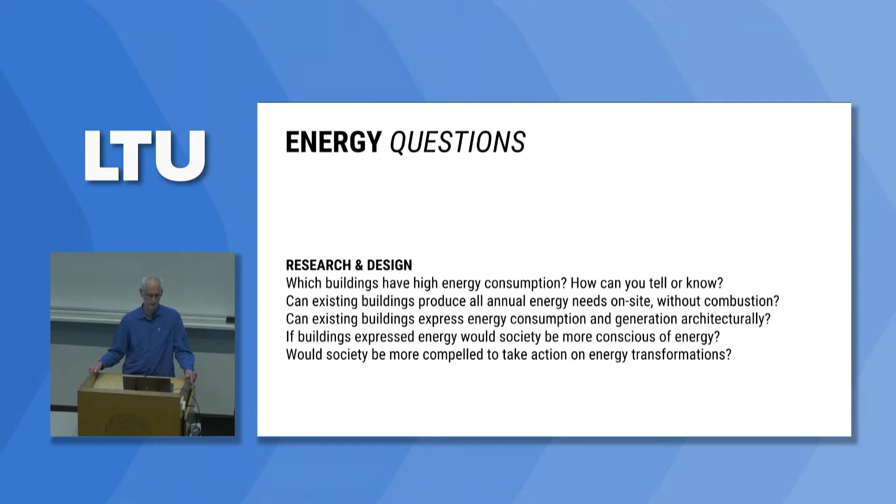I'm going to primarily talk about solar energy today, in part because it's fundamental to architecture. You know, daylight—there is no architecture without daylight as far as I'm concerned. Contemporary buildings can engage the heat of the sun for solar thermal, but I'm not going to talk about that at all. Contemporary buildings can also use photovoltaics to generate power for a building, and that's primarily what I'll focus on today.

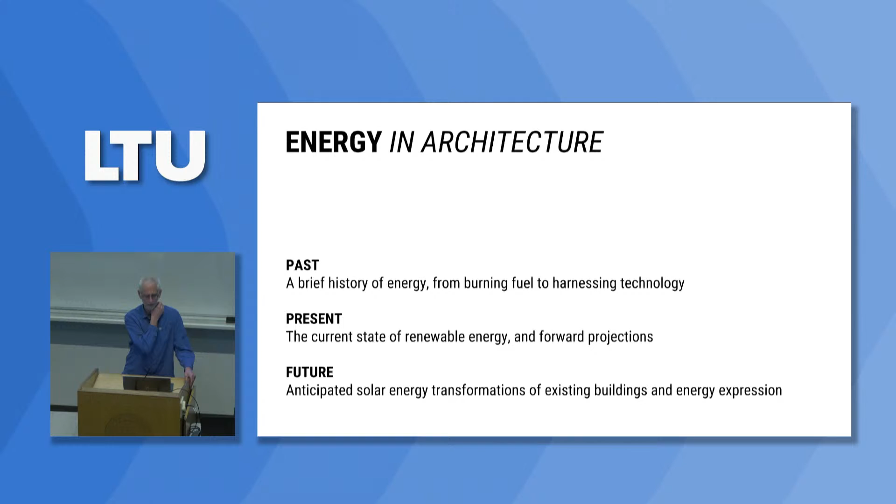The talk today is really three segments. I'll talk about the past, a little bit about the present, and then a future projection.

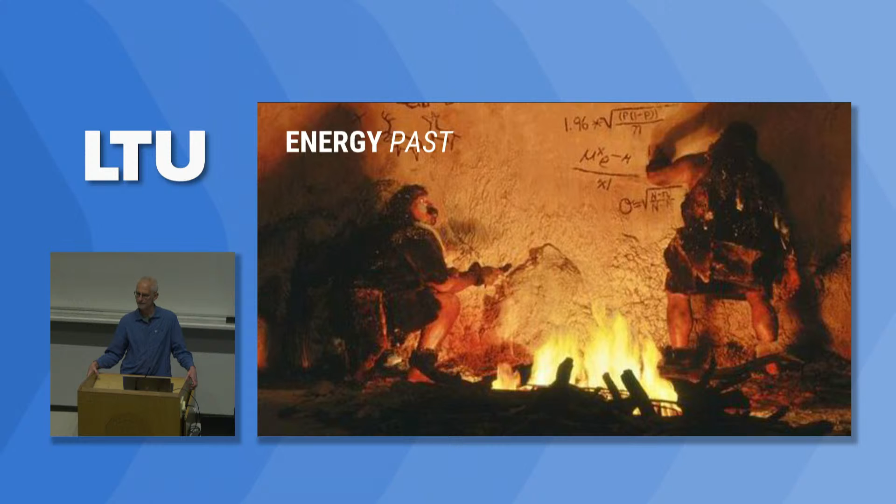So we've been burning fire for a long time for our energy needs. Fire was an amazing technological discovery, but the fact that we're still using fire for energy transformation today just seems kind of primitive.

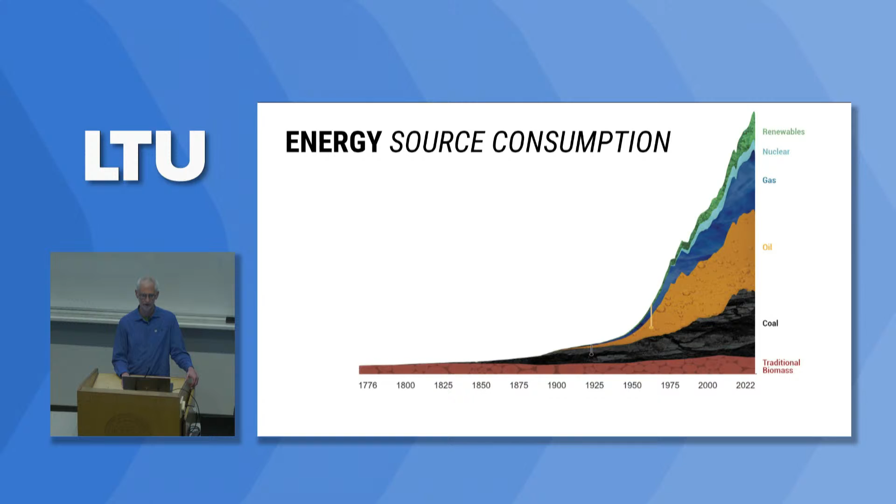Looking at the different types of energy sources, I distilled that for you all, partly to try to build a logic for how energy sources have changed pretty dramatically, pretty quickly over time. It helps us think about the future if we understand what's happened in the past.

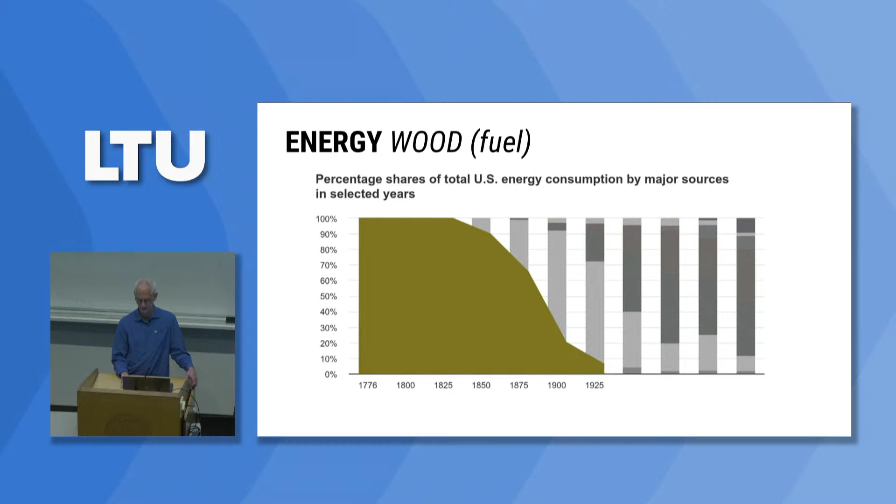So for the first 75 years of the US, basically we used wood for all our energy needs. What's interesting to me about that is it was very localized or regional. Most interestingly, every building somehow expressed energy in the architecture—it was fundamental to the character of the architecture. Not only for the buildings, but actually how spaces were defined. I think it's an amazing place.

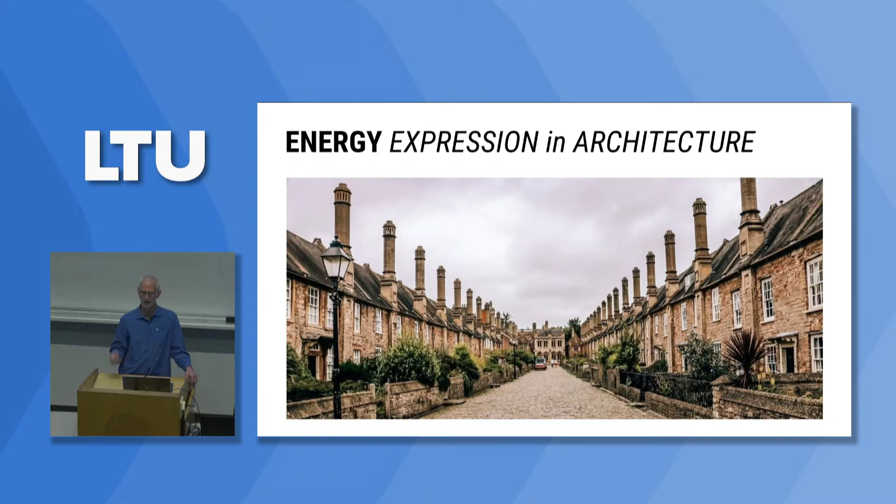I think it's amazing just because the energy expression—the expression of the chimneys—defines the street. It gives it its emotional character. But you also can breathe the energy.

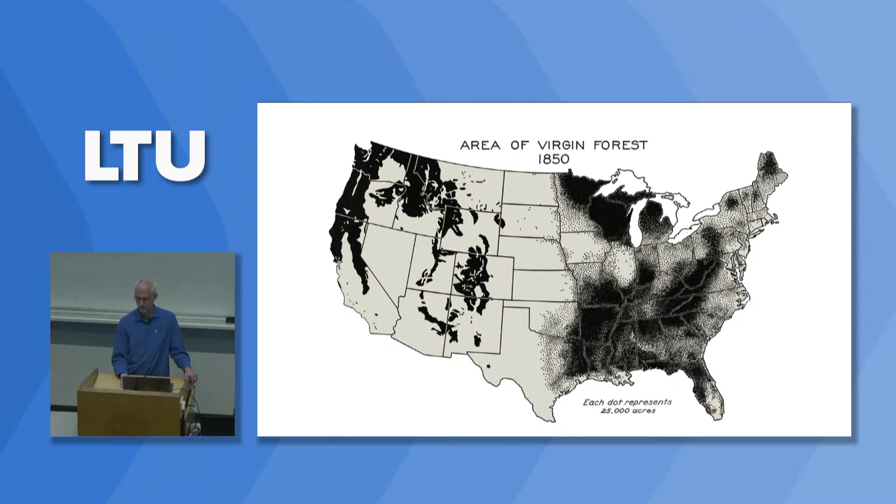Now, the downside of burning wood for fuel is you start out with a lot of trees, you start cutting them down, and pretty soon you're left with not much. So we were actually running out of fuel pretty early in US history. Another thing I think is interesting about wood for fuel is you can actually see where the source of energy comes from, see how it gets transformed, and see how much is left. And that's right in your face—it's in your environment.

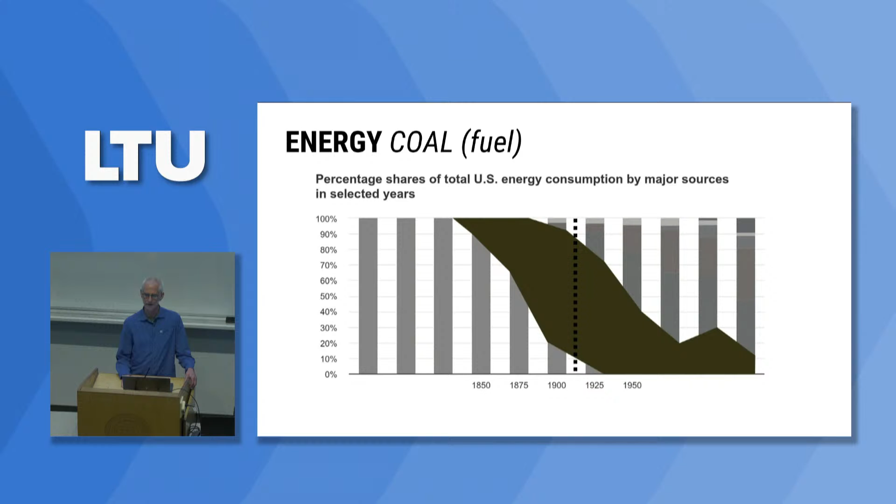So, I guess luckily or unluckily, coal quickly replaced wood as a fuel. Coal had a good run of more than 75 years, but basically by the early 1900s, we were relying on coal almost exclusively for all our energy needs.

There was some amazing architecture that emerged, kind of classic Albert Kahn building, where the energy expression, these tall chimneys, were fundamental to the character of the architecture.

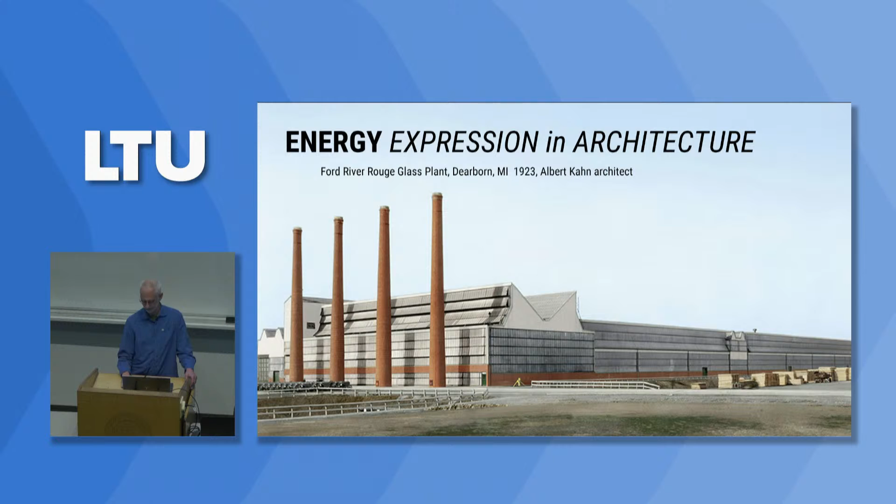But we also have long forgotten that this was what the environment was like when we burned coal. I still remember as a kid going to Pennsylvania and passing all the coal mines, getting on that hill just before you come into Pittsburgh, and right as you get to the crest of the hill, it was just black smoke and fire. The entire valley was filled with black smoke and fire. That was a reality when I was a kid. That wasn't that long ago.

I think we also are all conscious about our extraction practices and how that relates to the environment. I think a lot of people want to do something about it.

In the early 1900s, when our demand for energy started to increase, we actually were smart enough to turn to hydroelectric power. And that's still a major energy source today, but small in comparison to burning fuel. The great thing about hydroelectric is it's a technology - you're just basically using the latent energy in water as it changes level to drive turbines to generate electricity. So there's no fuel involved, it's just a harnessing of simple technology.

Our mass electrification that happened in the United States from just before 1900 until about 1950, when pretty much 100% of buildings were electrified, was in part based on leveraging hydroelectric power. The reason hydroelectric power seems kind of like a continuous band for that period is because of the rise of other things. Everyone knows the Tennessee Valley Authority - there was a whole ton of hydroelectric public works projects in the US, and most of those are still in operation today.

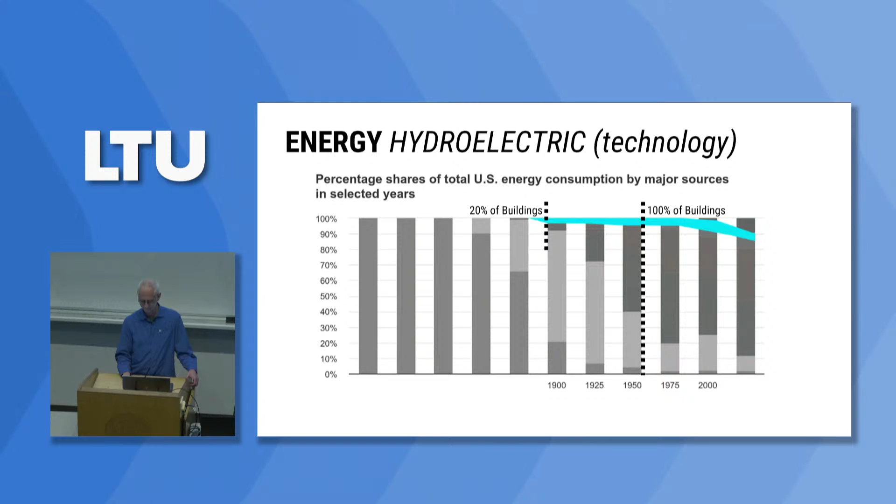So in northern Michigan, Sault Ste. Marie, in 1900 they were wise enough to build a hydroelectric plant, taking advantage of the 25-foot drop between Superior and the St. Mary's River. That's still in operation today, provides a third of the energy for the UP, and it's all done without burning fuel.

And also, this is an expression of energy in architecture. If your building is a dam and water flows through it, that's expressing the energy. Unfortunately, not every building can have a dam or have turbines in it, so it's just the source can express energy, but not the delivery or the buildings on the delivery process.

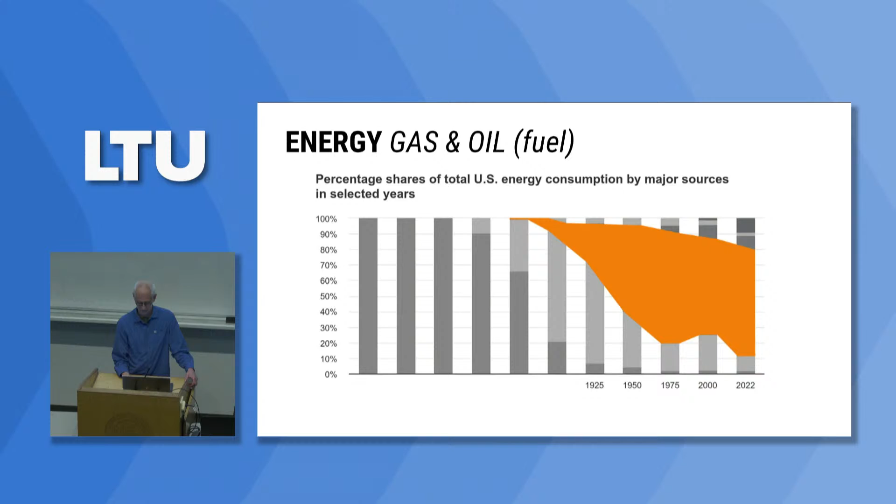So in a transition from coal, we went to gas and oil. A lot of that discovery and technological innovation happened in and around this area, Ohio especially. How is gas and oil, which is essentially the predominant energy fuel that we use for buildings today - natural gas being predominant - how does that get expressed in the architecture?

Ultimately, it's just kind of like magic. We don't really know about it. Architects have kind of relegated dealing with energy aspects to engineers, and the best we do as architects is maybe hide it on the roof or put some screens around it, or sometimes the screens are more interesting than others, but essentially we don't care.

This really made me think a lot about how we perceive energy in society. If something is not visible, you tend not to think about it. And if architecture basically hides the sources of energy, that's preventing society from actually being aware of the role energy plays in our lives. So what if it's visible to experience? What does that look like? In a way, old buildings used to do that.

Another major energy source, fuel source, is nuclear, obviously. There's some issues about why we started doing nuclear. Part of it was leveraging technology from World War II, dealing with atomic energy. Part of it was the amazing 15-year, 250% increase in electrical demand in this country - it's like the beginning of our insatiable desire for electricity.

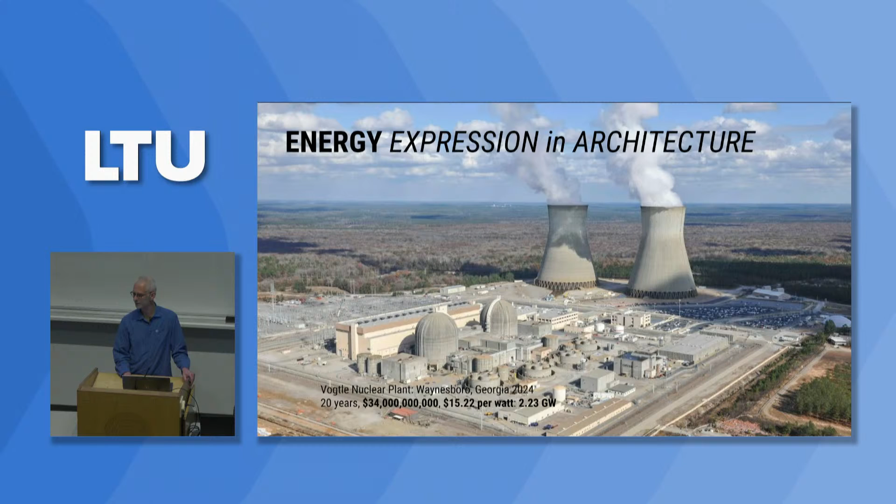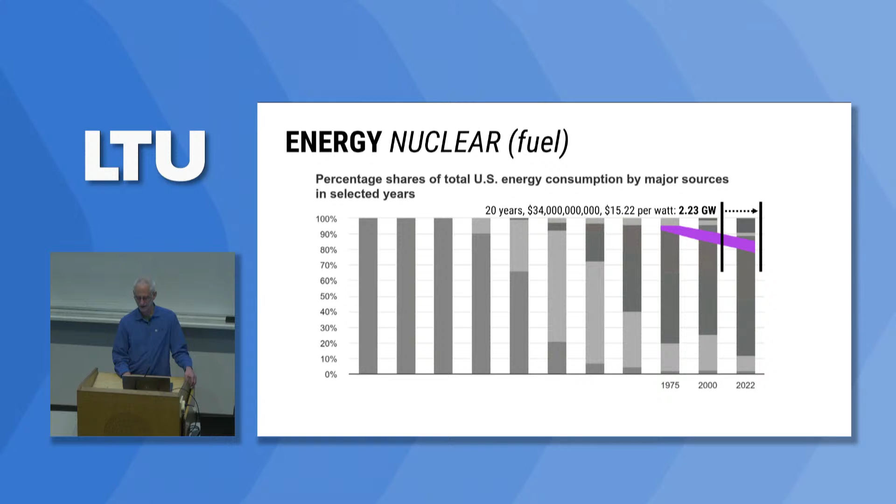If we look at how long comparatively, on this energy timeline in the US, it took for that one plant serving a small amount of people to be built, it was an extraordinarily long period of time relative to the changes that happened. So this kind of gets us to the present, where there's major energy transformations in the US.

But electricity, we all know that mass electrification is going on in society, right? And electricity is going to be our primary energy source. Electricity is great. The majority of it is produced by coal plants and natural gas.

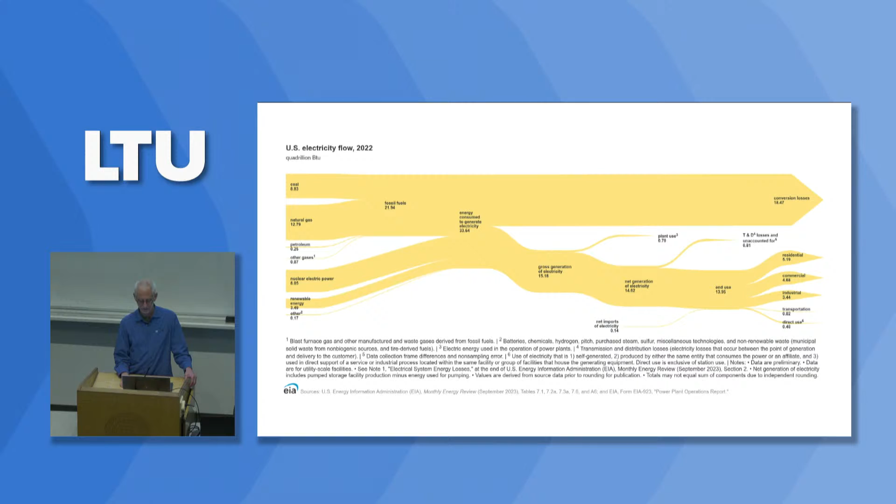The major problem with depending on fuel to burn is that 57% of the source energy is just lost in the process, through extraction, through actually heat burning, transmission loss, all of this. So really, out of all that source energy we're using, primarily for fuel, only 43% gets delivered to buildings. So again, getting back to fire being primitive, where else in society do we expect 57% loss as being acceptable? It just seems kind of bizarre to me.

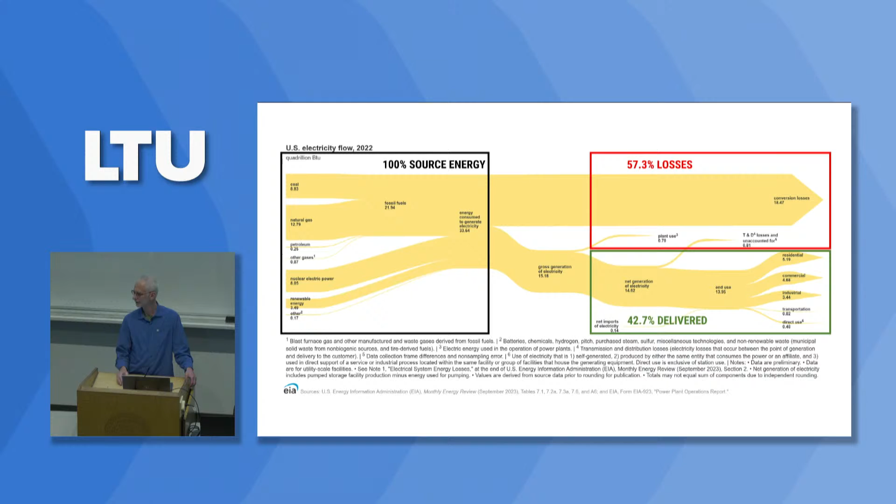So starting to look ahead, some future projections. If we want to get by 2050 up to at least 70% renewable and start to wean off of fossil fuel and primitive burning, some things have to change.

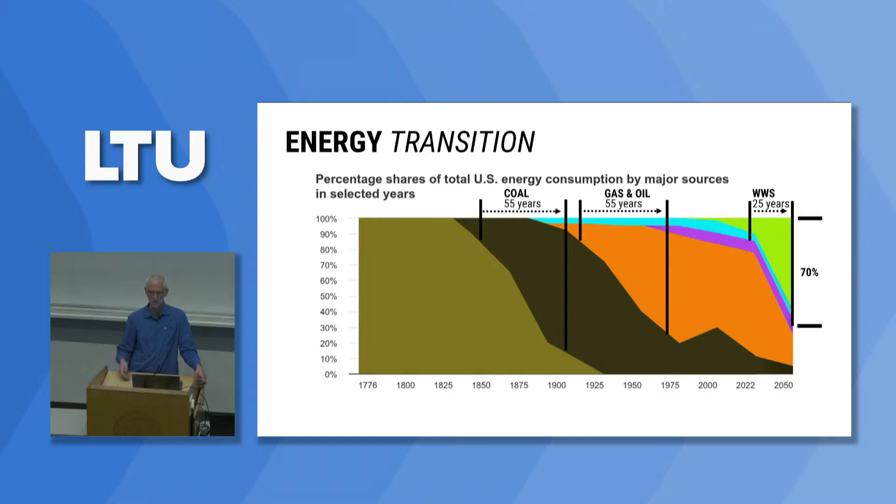How long does it take to get to 70% of a particular fuel? Coal took about 55 years, same with gas and oil, that transition. So we've got 25 years to transfer to renewables. But 25 years seems totally reasonable when looking at it in this scaled time frame. And also everything happens faster today than it used to in the 1800s and 1900s. So it seems totally reasonable to me that we could do this. This can happen.

And the sort of technologies that are emerging now, primarily wind and solar, those are also technologies that leverage existing energy sources. You don't burn fuel, you get into energy. And in 20 years, just with wind and solar, we've added 330 gigawatts. Now remember, that 20-year nuclear project was 2.2 gigawatts. So we know that in 20 years, you can have 150 times more energy potential using wind and solar.

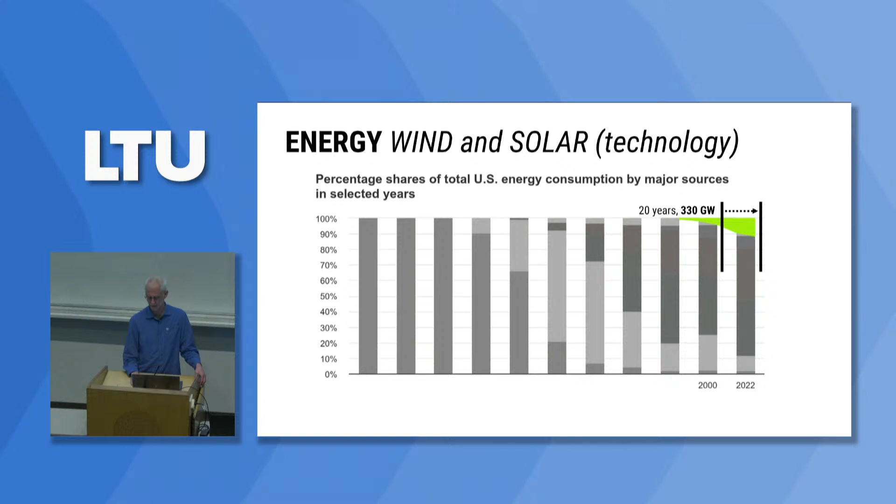So all the major US power industries are going to solar and wind as fast as possible. All of the major growth is primarily in solar because it's the easiest and least expensive. Wind is great, but you've got some limits to it, but it's $1.55 a watt currently to do wind power. That's compared to $15 a watt for that nuclear facility, right? And then sort of industrial scale PV is right now about $1.06 per watt. Of course, you need a lot of area to do that.

We were just down in Ohio on Monday to watch the eclipse, and we passed a bunch of wind farms as well as solar farms. So currently, Ohio has almost 80,000 acres of solar fields. In fact, there's one going up right at the Michigan border. This one is, I believe, in southern Ohio.

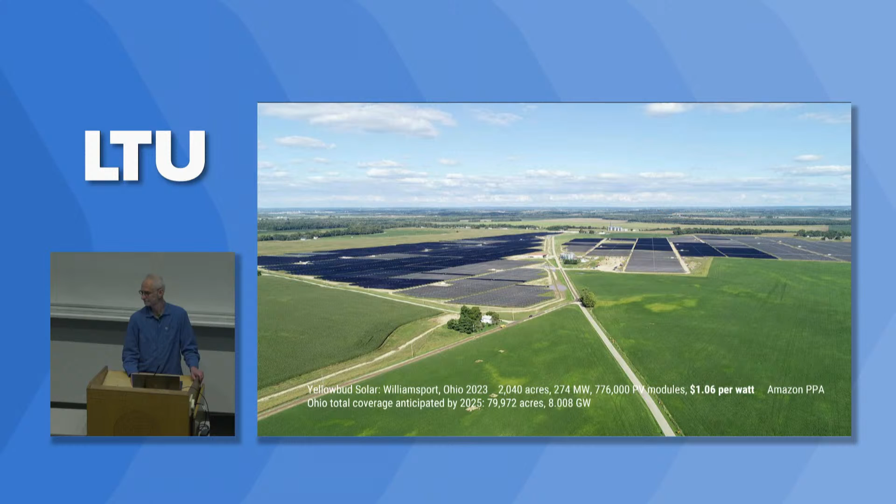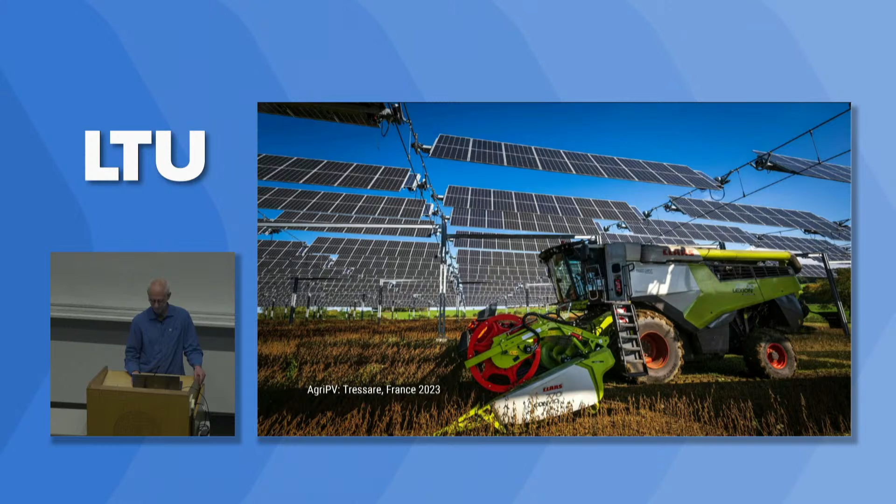It's pretty good. I wish we had in this country a policy like France has, where agriculture and PV work together, and they don't have as much land as we have in the US. Actually, it's scientifically proven that plants do better under PV because you lose less moisture from the soil. So why can't we do this in the US? We certainly can.

MSU in 2017 took another strategy. They formed a power purchase agreement to erect 45 acres of solar carports on the MSU campus. Of course, they have giant parking lots just like LTU does. But they realized early on that even though it's a purchase power agreement, they didn't pay for the carports, they didn't pay for the PV modules, they didn't really pay for anything. An outside energy company came in and said, we'll front you this, you're going to pay us a steady rate over time. And MSU decided to do it because it saves them $10 million over the life of the system.

And this is happening for more and more large institutions now because it's just way cheaper to do it. I wish LTU would cover our parking lots in this manner. The benefit of doing this is not just to save money or create clean electricity, but actually to take stupid parking lots and make them at least more interesting experientially.

And so these are now used for tailgating parties at MSU. People have some sense of experience when you arrive to campus that there's a transition from a carport to a building, and you get some protection from sun, from rain, from snow. Personally, this wasn't designed by an architect, but I think they did actually a really good job in doing this. But architects aren't really involved with this at all, as far as I'm aware.

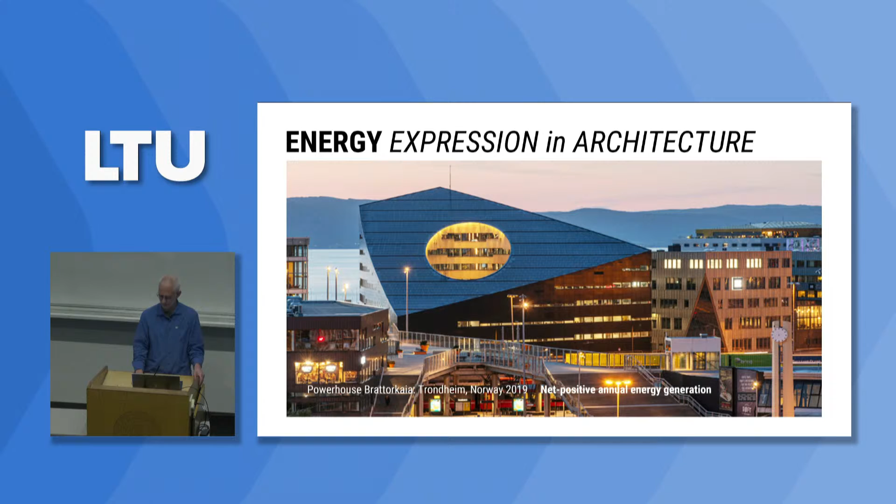So again, we have contemporary new buildings where PV integration is, I think, a no-brainer. It's relatively easy to do. Faris was telling me that architects should think about that early on so that the engineering can support it. But people commissioning buildings, there's just no reason to not budget PV because it'll pay for itself in about 5 or 6 years on any building.

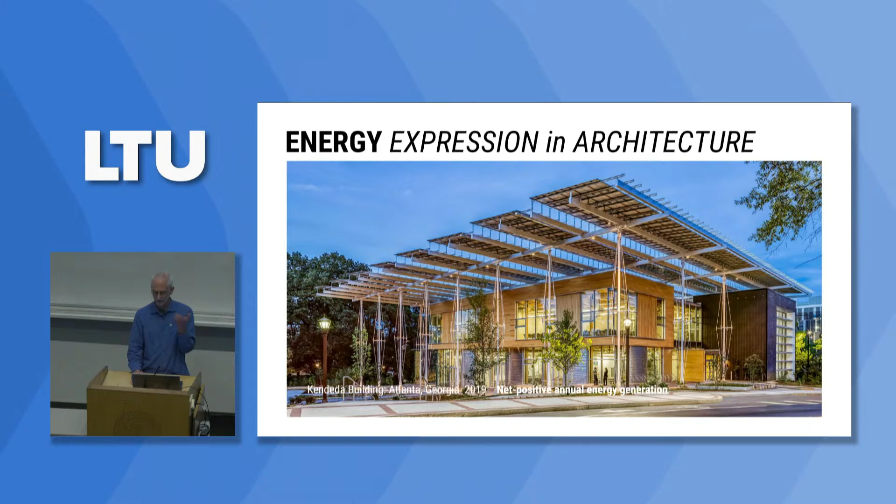Some architects with new buildings, a very, very small percentage of architects, are actually integrating large PV arrays into their new building design, and the works are notable. They're net positive in terms of energy. So I think, for me, the future generally for all of our energy needs is going to happen through technology, not burning fuel. And for architecture, I think solar technology is the most obvious. Part of that is just we've got an amazing amount of latent energy that comes to the Earth every day just from the sun.

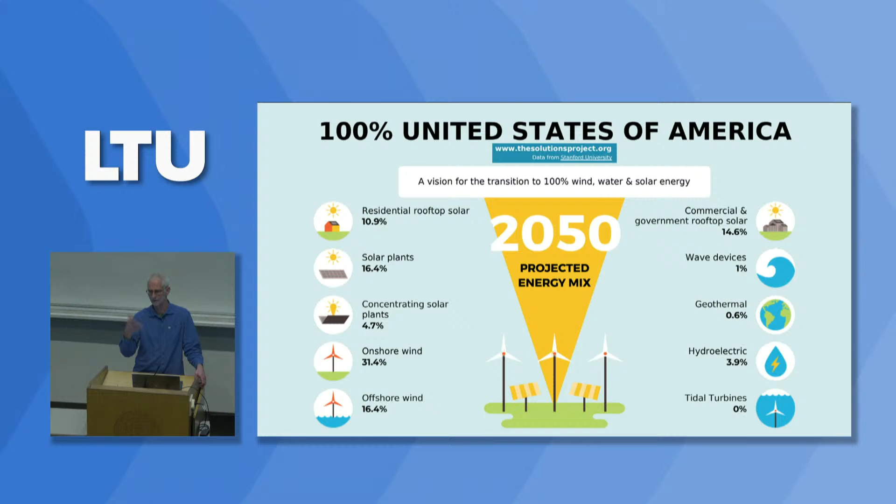So there's a very interesting website I found, an organization called the Solutions Project. Basically, they've outlined a strategy to get to 100% renewable energy by the year 2050, that's where we want to keep global warming under control. And what interested me about this is that 25% of it is going to come from integrated PV with buildings, with architecture. So that just seemed to open up a larger opportunity for architects and architecture to handle this. But also it made me think, well, what about the few 100 million existing buildings we have? How do those actually engage PV?

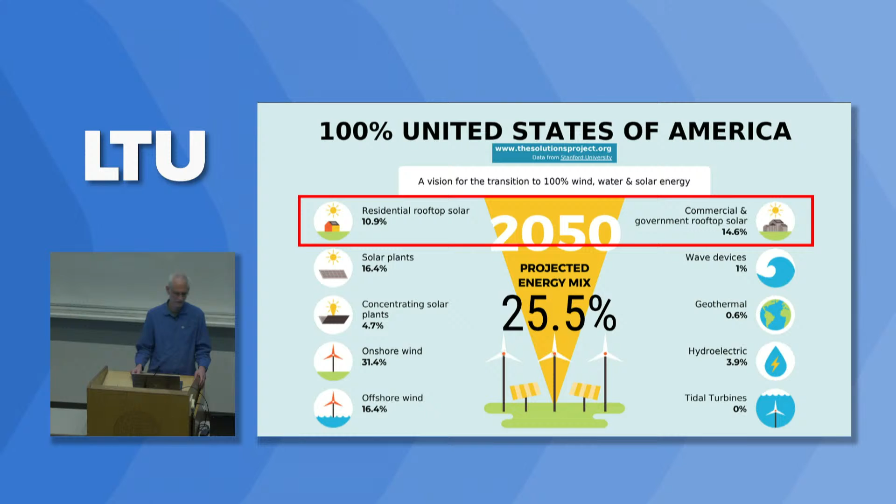So one of the things about electrification and going to renewable resources, we actually will reduce our demand by 51%, in part because we're eliminating all of those losses by burning fuel. People don't think about it, they think it's business as usual. And the amount of land that we need is less than 1% of the land and building area, so it's not out of the question.

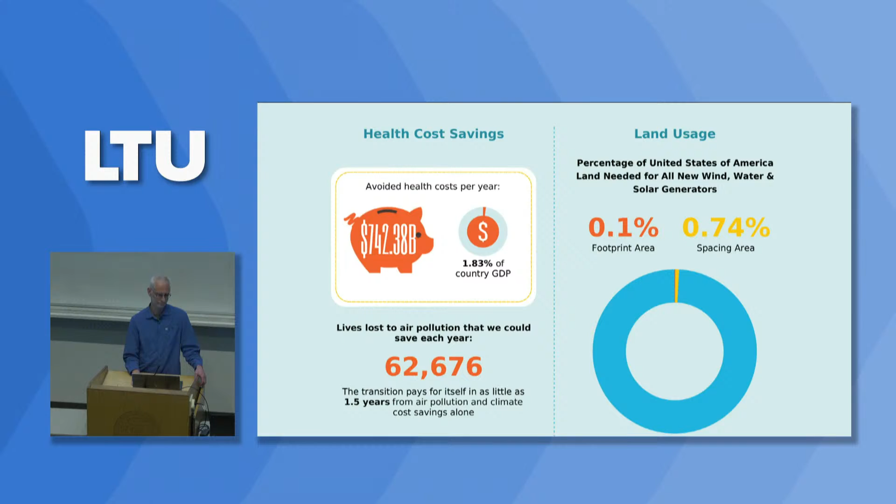And really, I think everyone is now asking the question, like, what's the future of energy? And who's going to be affected by the energy future? And of course, the simple answer is everybody, everything, everywhere going into the future. So we all have a vested interest, but it may or may not be conscious enough.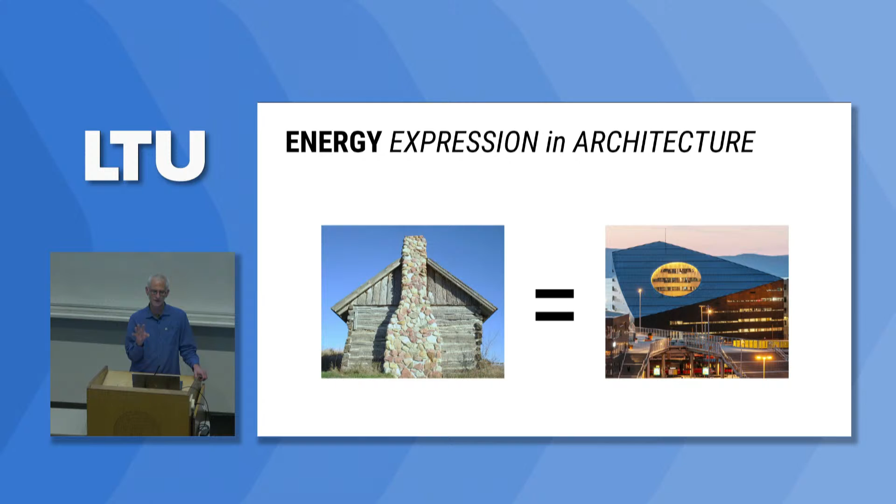So a simple diagram for what I attempted to do on the design aspect of my sabbatical was just have a desire to express energy fully in architecture, but not through new buildings, through existing buildings. So the way I framed the design aspect of the project was I selected some common buildings and common building uses that have relatively high energy consumption. I sized an on-site energy generation system, a PV array, that would be equal to the energy consumption of that building. So this equals that.

I tried to express the energy system architecturally, so it would have some redeeming experiential qualities, aesthetic qualities. And then I selected only existing buildings to test out the idea, just to see if that was a reasonable broad application.

So I think in some ways, the societal benefits and the audience for this project is really institutions, municipalities, corporations, the general public. How can we improve awareness of energy and positive perceptions of identity, mission, or brand for an institution or a municipality or a corporation? Public perception is everything.

How can we also enhance everyday functions and maybe introduce additional functions by implementing large PV arrays that are integrated with the architecture? How can we also maybe think about creating more energy independence for buildings, because we're going to have to decentralize our energy system in America?

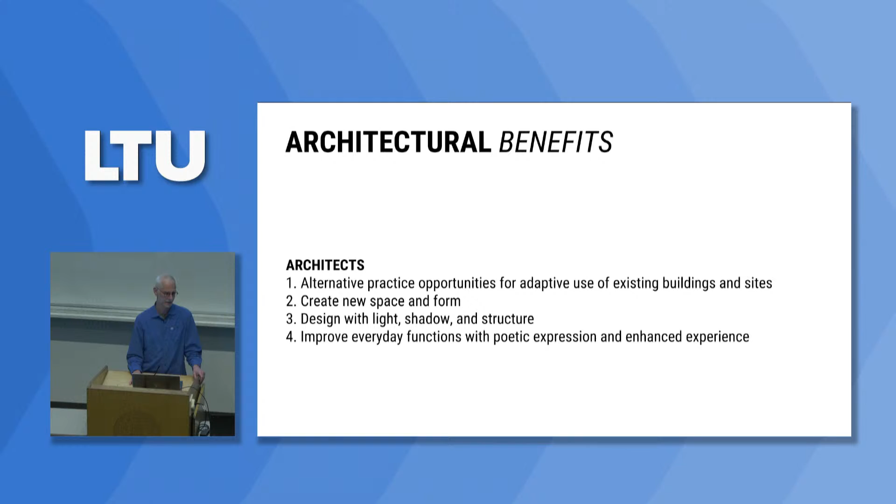They're almost out of the picture entirely right now. But architecturally, it gives you an opportunity to create new space and form. It allows you to design with light and shadow and with structure, things I love about architecture. And you can improve everyday functions with both poetic expression as well as an enhanced user experience. So those all seem like good things, good benefits.

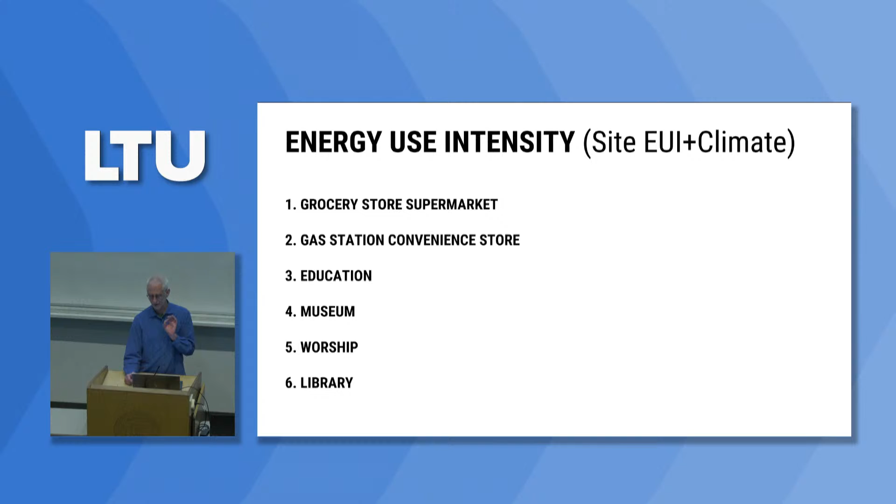So here's six building uses that I chose, in part related to their energy use intensity. So if anyone is wondering what energy use intensity is, basically it's just the amount of energy it takes to operate a building on an annual basis based on the square footage.

And there's two types. There's source energy, which is not only what the building uses, but all of the energy required just to get energy to a building. Site EUI is what I used, which is just the energy the building uses on an annual basis.

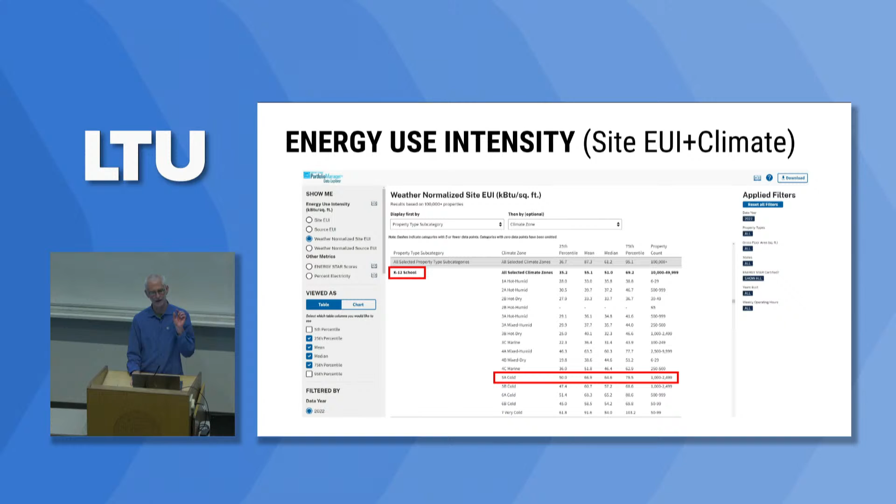Government has a fantastic website where you can actually identify site EUI for different use types that are also related directly to the specific climate you're in, because obviously buildings in different climates have different energy uses. So all of the projects here used our climate 5A, which is a cold climate, in terms of defining the energy per square foot intensity use.

In order to size PV arrays to meet that energy, once I found out the energy use of the building, I used a PVWatts calculator, which I've used a number of them. I found this one to be the most accurate in terms of validating it with real world buildings.

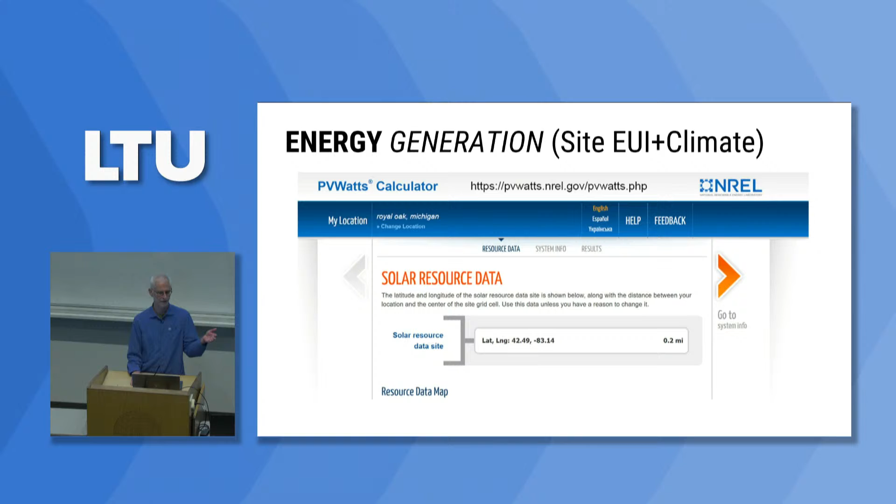And so basically, I just put in numbers, values that are related to the specific context I'm working in, and then adjust the size of the array to equal the amount of energy, annual energy produced each year that a particular building needs to have. So that tells me then, like, how many PV modules I need.

So basically the 6 sites I all chose in greater metro Detroit, and I'll take you basically on a tour of those 6 buildings. The first one was Trader Joe's.

So this is the brief version of some of the energy calculations I did. It just so happens grocery stores and supermarkets have a very high energy use, in part because of their operating hours. They also have freezers, coolers, these sorts of things.

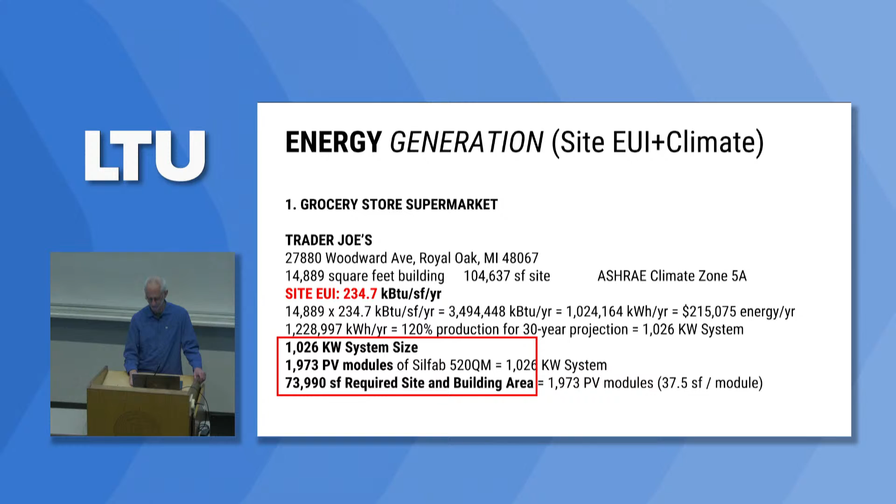Trader Joe's stores are relatively small buildings, but because of the energy intensity, they actually consume a lot of energy every year. Basically what I did in some of the calculations, I determined the building size, the size of the site, and then figured out how many PV modules I needed in order to meet the annual energy needs for each of the buildings. So that's where all these numbers come from, and this gets translated into the design.

I did also an economic run through of all six buildings. This just shows you one of them. Basically, if Trader Joe's put a large PV array in their Michigan store, their return on the investment would be a little over $9 million. So what corporation doesn't want to have a higher return on investment, right?

So this is a beautiful Trader Joe's right now. They have the dumbest buildings. They put no money into architecture. The parking lots are always crowded, and they're kind of ugly, right? So this is what it looks like now if you're coming south on Woodward. And that's if you add a canopy.

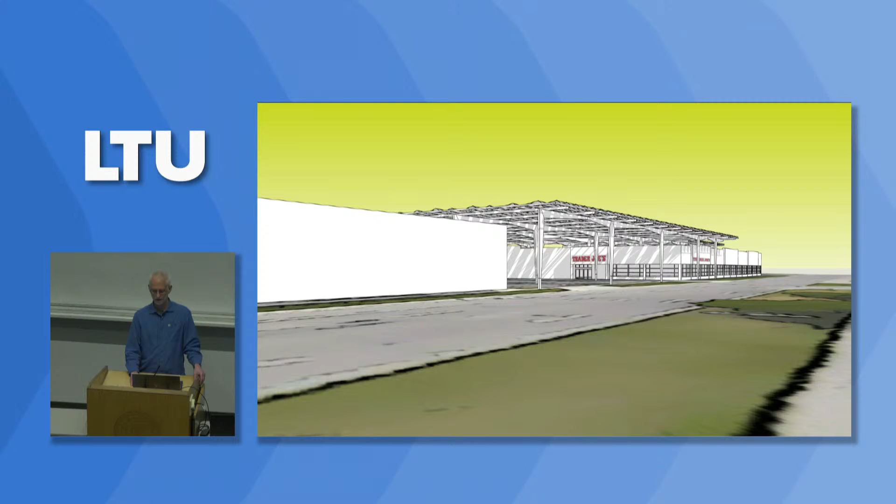First, it gives them presence on the street. Second, when you go into the canopy, there's actually a space there. It's not a nothing, still crowded as ever, but the space can be animated, modulated with light and shadow. And we can put the columns down so that cars won't run into them. Some other features, you can add a skylight system, take away the PV, so you actually have a covered entry. These are super pragmatic things, but they actually begin to enhance the everyday experience of a really stupid building and a bad parking lot.

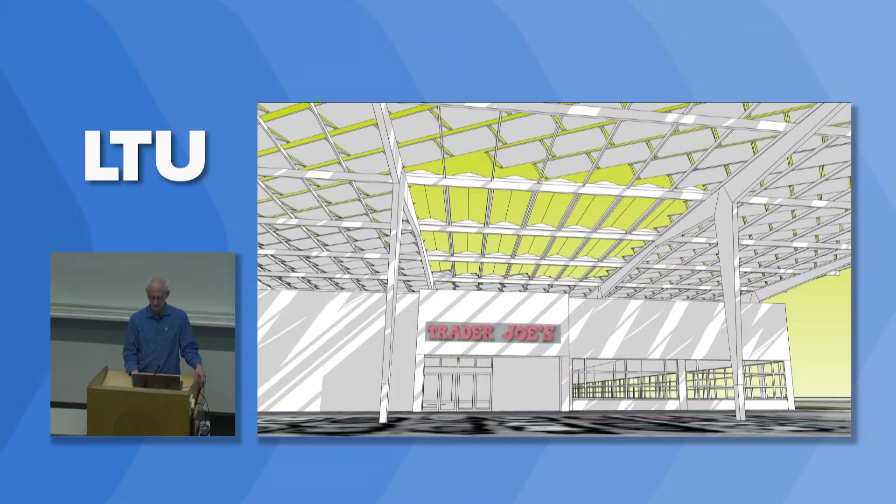Essentially, it's kind of inspired by the old Les Halles Market in Paris, this idea that cars and market and overhead canopies can all coexist and also work to improve the overall environment or architectural environment.

In terms of kind of going through how I worked through the design, I did several iterations. Solar south is up and down, heading down, and then Woodward is off to the side. Here's the large PV array that fits in. The way this would happen is basically you have to define the structure of the PV array in relation to the structure of the building. The structure in the parking lot is related to the spacing of the parking lot.

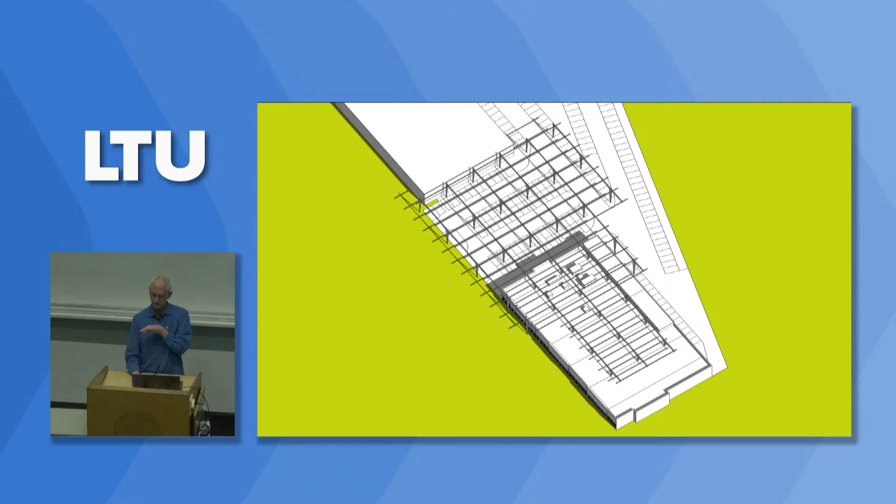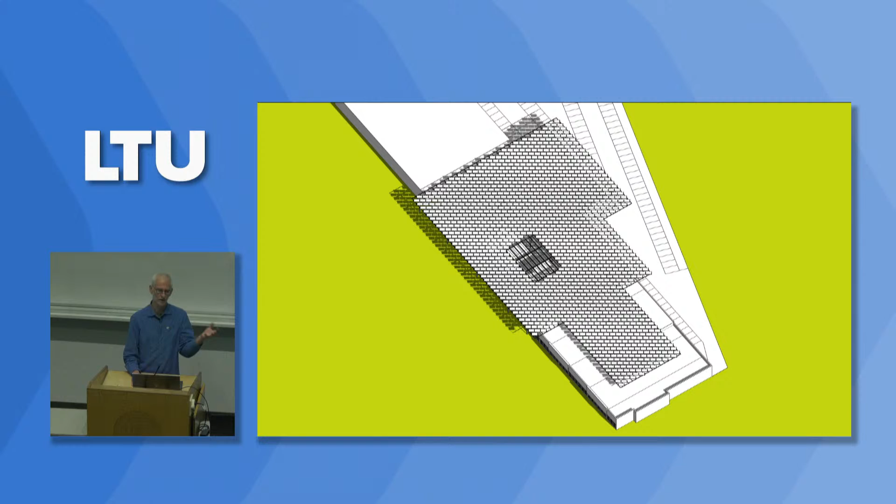You add horizontal structure to support. You'd add your skylights for the entry. You would add the rails to hold up the PV, and then the PV all goes in, biasing towards the south. I went through a number of scenarios for tilt angle, overall area, overall production. But basically, this is what it would be in context.

At a detail, basically each individual module is oriented in such a way to optimize its effect. But what's most interesting to me is to think about a PV module more like the petals of a flower or the leaves of a tree. We all find trees and flowers beautiful, and that petal quality is a certain aesthetic quality. If we thought about PV modules not as just dumb things for an engineer, or practical things, but how can we express them architecturally, I think it'd be more interesting.

The second project is a BP station. This is basically at Woodward and 94. Beautiful building. I don't know why they have such ugly buildings for a major oil corporation. You'd think public perception would be important for them.

Their annual profits of $13.8 billion in 2023 suggest that they have some money to spare. They spend about $200 million a year on advertising. You'd think, well, isn't public perception really important for energy companies? And what can they do to actually increase general public support for their endeavors?

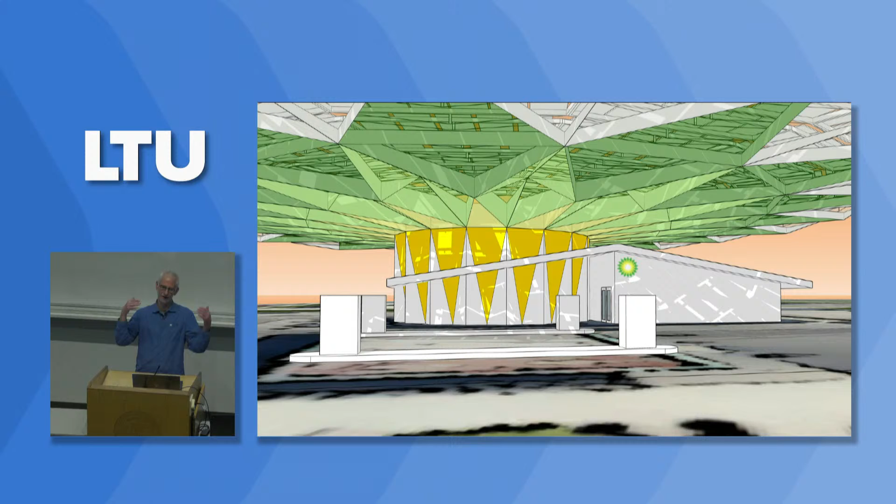It was important for Mobil to change its image. I think it should be important for BP to change its image as well. Part of what I like about this is that most of the energy used is just for pumps and then refrigerators and coolers for the convenience store part. The idea is that you literally see the energy of the PV transforming down into areas where you have the coolers on the inside, and when you look up, you can actually see that architectural effect.

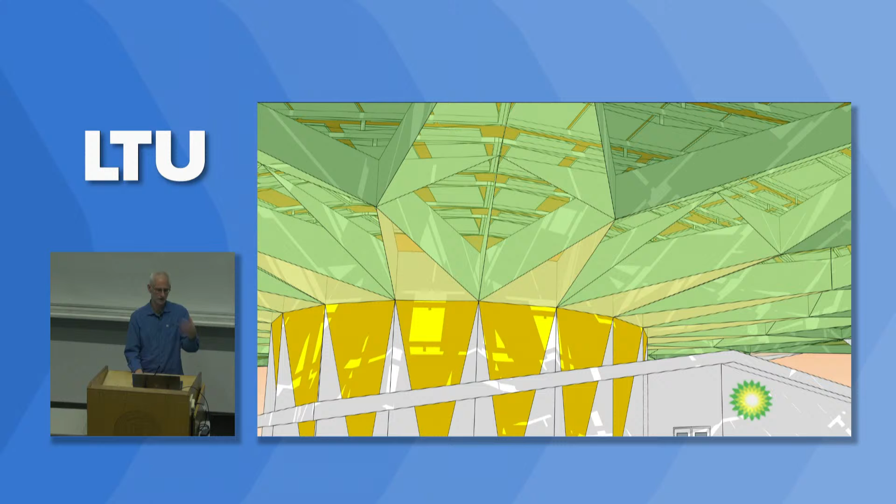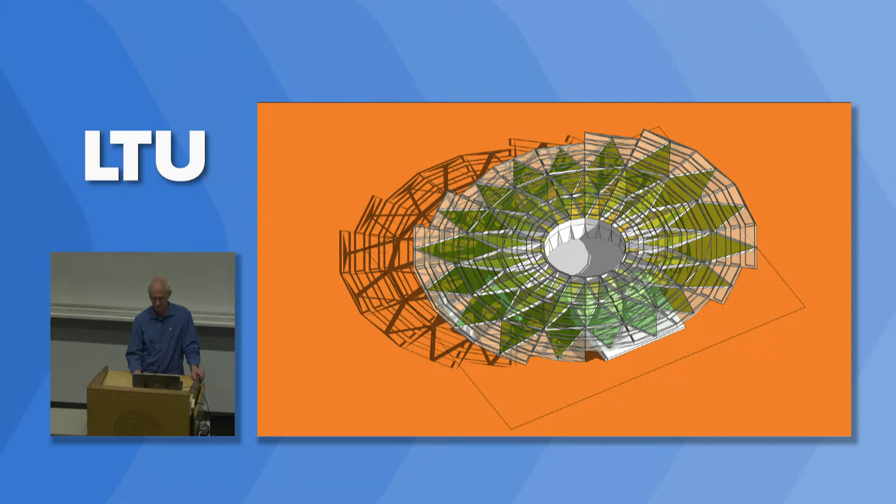In terms of how this works, there's a particular orientation on the site. First, get rid of the old canopy, add new support within the building. The structure for the new canopy could be some sort of carbon fiber or a mix of ETFE and carbon fiber. Rails for the PV, and then finally the petals.

So its presence on the site, or the Google Earth view, also has something to do with projecting what BP is about.

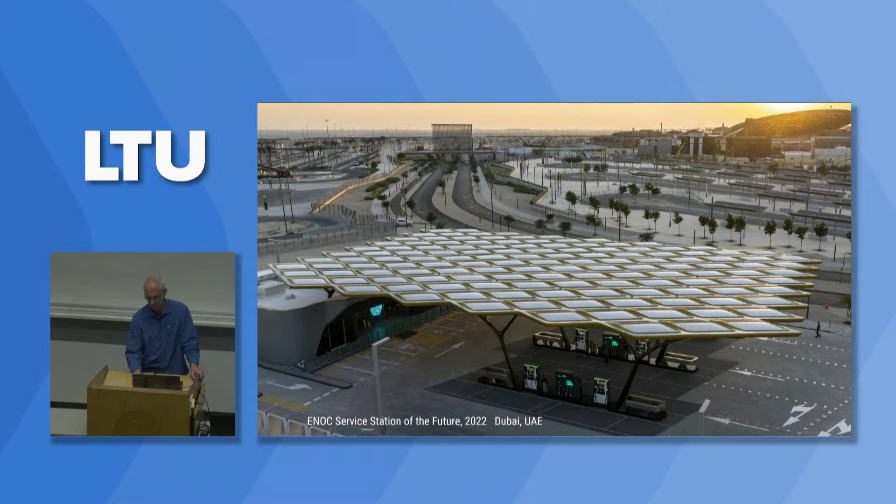This is a service station built in Dubai for a major exposition. It could have had PV, but they actually have an off-site PV that powers this building. These are basically just skylights over the canopies. It does have a carbon fiber structure, with a light and magic show underneath. So interesting, but it doesn't really address energy. It does address architecture—I think it's pretty awesome, but I wish it actually addressed energy.

Next project was Cass Tech High School near downtown. Some of you may know it. This is what the building looks like now. It was actually a brand new building in 2005, costing $127 million at the time.

They didn't budget anything in for a PV array, although at the time that would have been the perfect time to do it because it would have paid them back tenfold by 2024. They have major energy expenses, a giant building, 240,000 square feet. I don't know how many square feet we have on the LTU campus, but they have 2,400 students, 140-some staff—it's like a little village, a huge complex. The architecture has sort of a tech quality to it.

Surprisingly, schools, universities even more than high schools, are pretty intensive energy users. In order to have a PV array that equals the amount of energy used annually for this high school, you need 7,667 modules—a really big system, almost 4 megawatts. And you need about 360,000 square feet of space to support that.

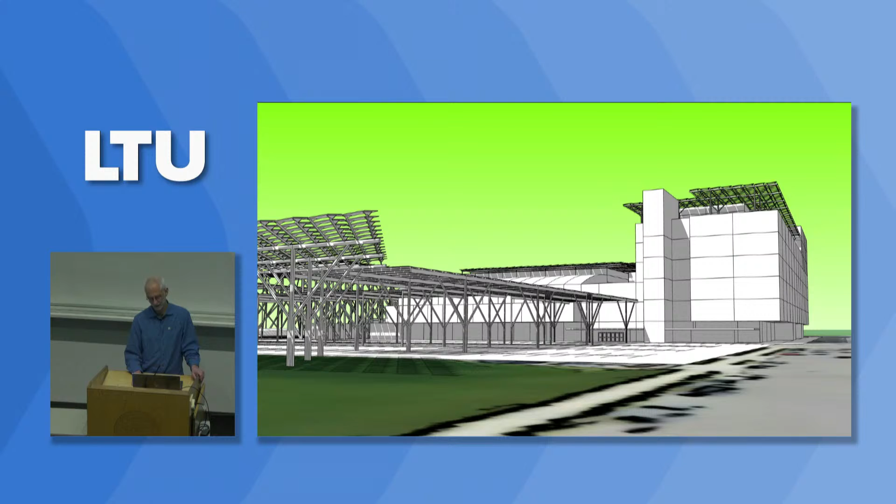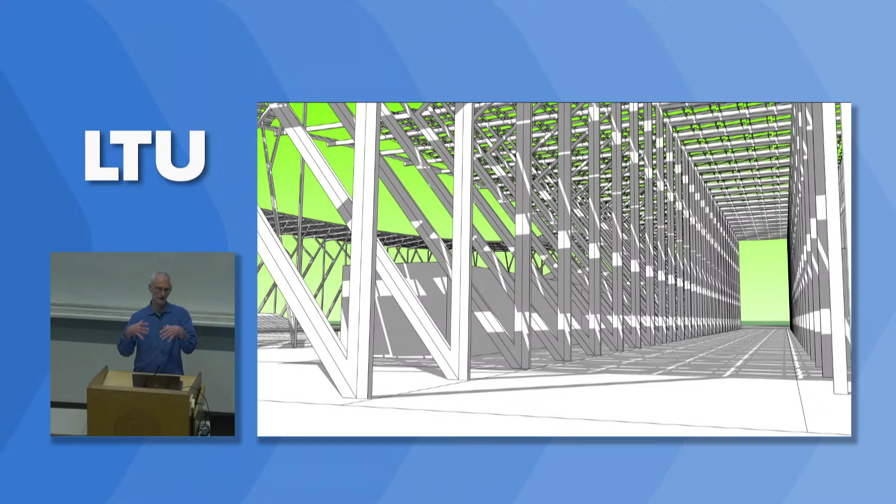Part of it is just defining the main entry off of the giant parking lot. The entry gives you a connection, a transition between parking and the building, a little shelter. As you move along the building heading towards the back, you look to the right and see the whole service corridor is also tricked out with support for PV.

But the more interesting thing is the football field, now a football stadium—the stadium is just the PV supports and the PV array.

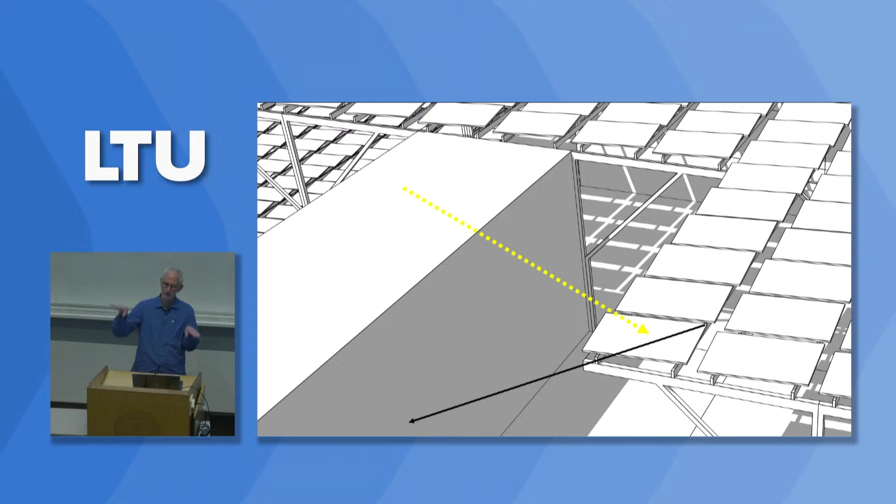The PV system is integrated with the building in a somewhat strategic way, elevated off the roof deck so you can do maintenance, but also trying to complement the existing tech nature of the architecture. The PV modules actually have a tilt on the diagonal, so they're all tilted directly south, even though the building and the urban grid are different. This is essentially the footprint: football field, building, giant parking lot.

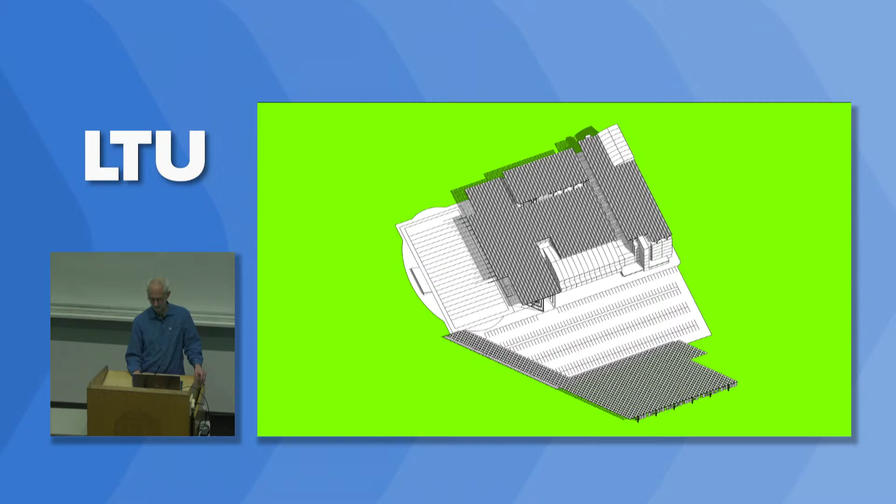First adding structure and the PV modules in the building, extending out into the service area. So this is still only about half of the modules required. So then actually defining the south entry and west entry with PV in the field, and then finally the stadium and the parking area. And then, of course, it's essentially branded for the Google Earth view of Cass Tech, right? The C and the T.

Next building up, Ford Museum, Henry Ford Museum. 1.7 million visitors per year, so a huge number of people see this building. It's on the National Historic Register, a 1929 building. The front 800-foot-long facade is actually built with buildings that are copies or replicas of buildings at Independence Park in Philadelphia. But then there's a gigantic, essentially, warehouse behind it, which is the museum itself.

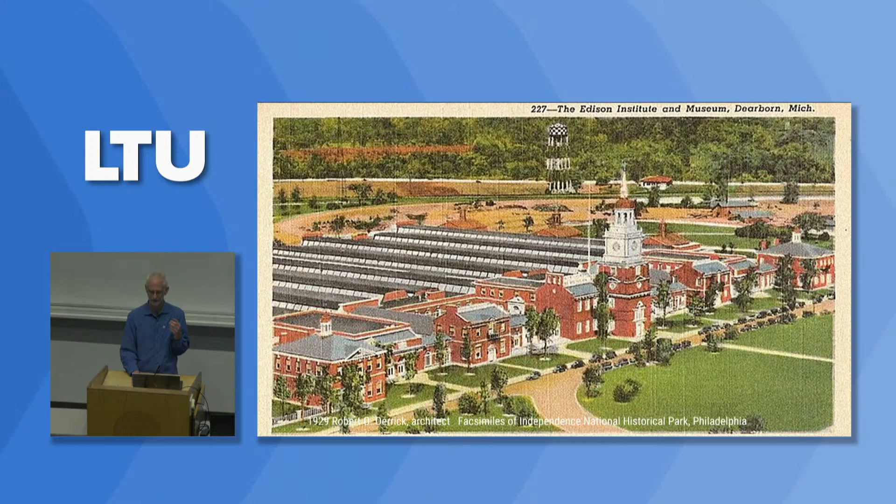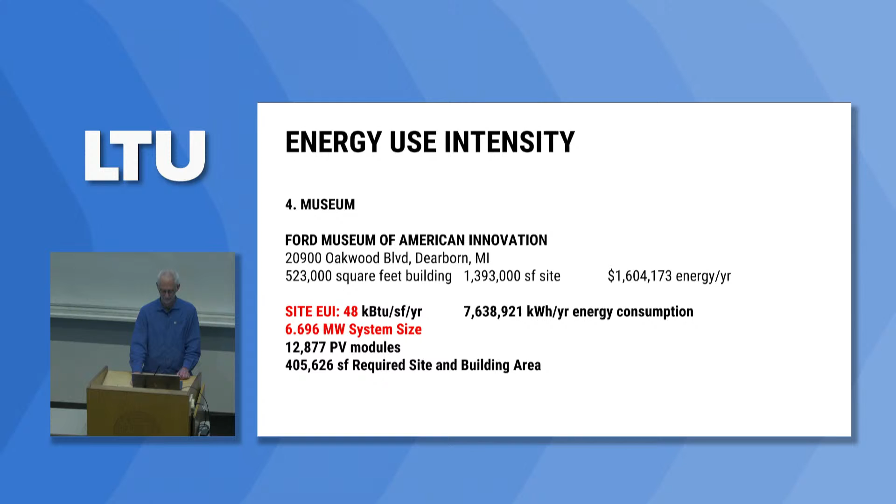So the Ford Museum is a gigantic building, more than half a million square feet, really huge. Museums have pretty high intense energy use, and so this one needs an almost 7 megawatt system, which is pretty huge. Pushing 13,000 PV modules and 400,000 square feet of area that's required.

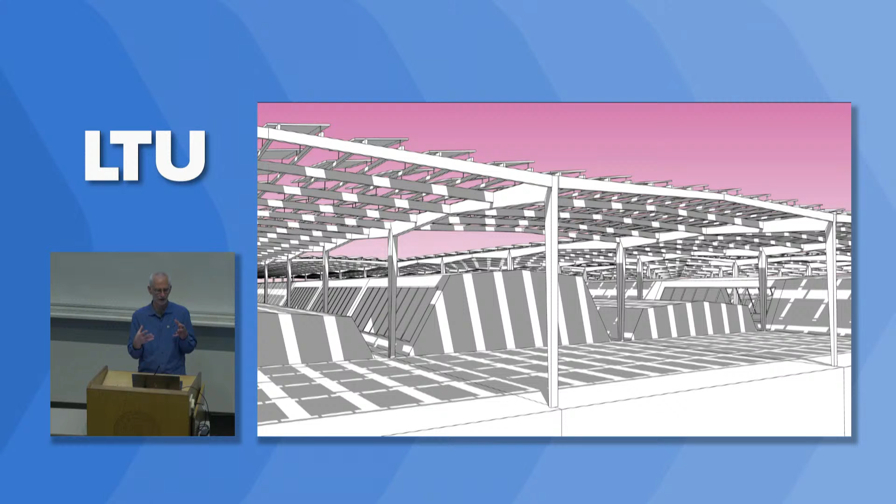And then when you get up on the rooftop, you see that the entire building has this whole series of undulating roofs. Basically these were formerly light monitors that ran the entire length of the building. So the PV array is elevated above for practical reasons, but also you can open up these moments where, if in the future you want to admit daylight back into the spaces, you can. So this is what the structure of those roofs is like. It's basically just like a factory construction, right?

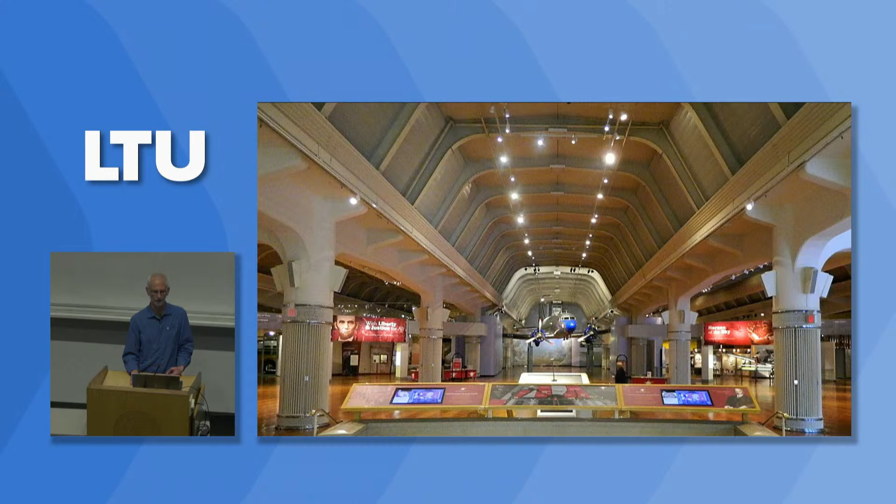The whole building used to be naturally daylit, but by the 1970s, single pane glass and metal frames just weren't doing it with the energy crisis we had in the 70s. So basically they sealed them all up. That's what it looks like today. The museum's still interesting, but architecturally it's not so nice on the inside.

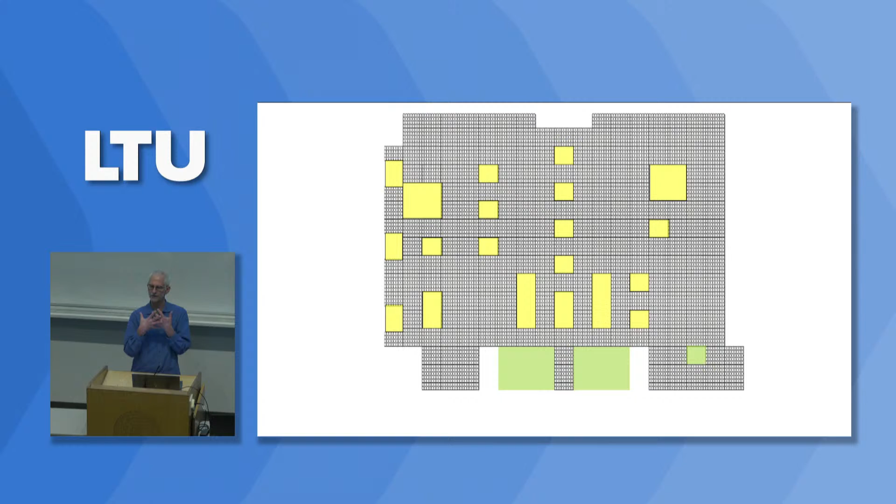So if you wanted to reintroduce daylight - part of what they do is devote 15% of their square footage to power, innovations in power. And I'm thinking, well, where's the current innovation in power or energy in the current building right now? But if you wanted to introduce daylight, a curator would strategically define the zones where you could introduce it. The PV array would essentially support that, or you'd modify the PV array to do that, so that all of those things get integrated and you can add or enhance future functions and experience.

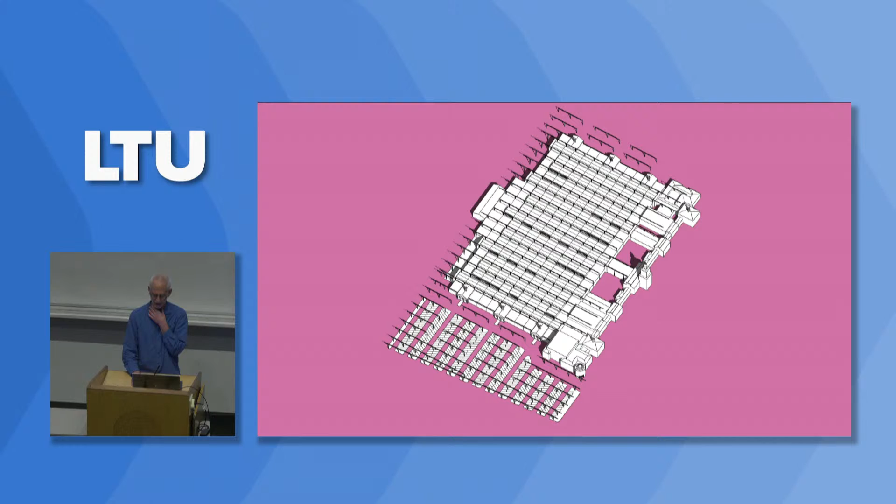So same thing here, you'd introduce daylight first. The whole building needs to be re-roofed, and actually the mechanical systems need to be replaced. It's like a $10 million project just to do that. But it would actually be less money just to put the large PV array on. Building and then site work. So that's what it looks like in context.

And of course, this is Ford, so we know what Ford has been saying and their commitment, I guess, to going all electric with their vehicle fleet in the future. What does it say about the brand, the identity, the public perception? I think this makes sense.

Next on line, a mosque, Mosque al-Salam, which is south of Dearborn, or in Dearborn, but north of the giant Ford facility where they're basically dumping coal every day. The community center, the mosque, they took an old warehouse industrial building and basically just renovated it for use as a community center and a mosque.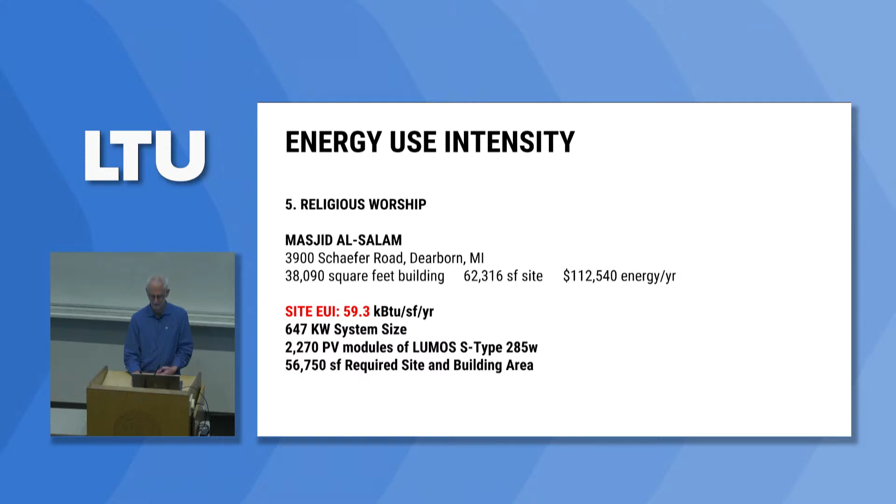Religious buildings have a relatively high energy use, and in this case, it required a large number of PV modules that could be accommodated on the overall site and building, but just barely. So one thing that was interesting about doing the mosque is, when you do PV, you have to think about orientation.

The most important orientation in the mosque is to the Kaaba, the Qibla. I don't know if any of you know how that's calculated—there was actually a lot of controversy on how you determine that direction correctly. But from Dearborn, you actually have to go north, because going north is the shortest distance around the sphere of the Earth to reach Mecca. So that orientation happens to be north, even though we know Mecca is south of us.

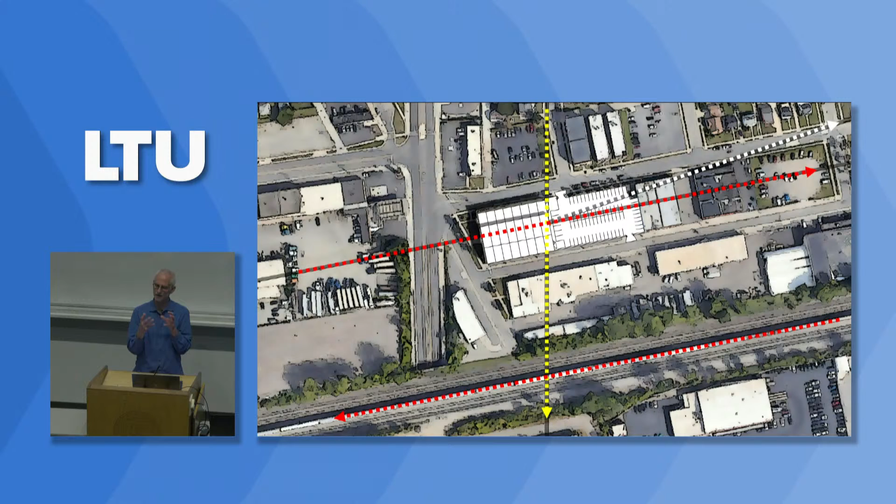Interesting that the whole Qibla orientation used to be done just with sun and shadow to determine the proper orientation. So in this case, solar orientation also works with the Qibla orientation, and then the other orientation the building has is to the industrial train line that was put in. The convergence of these three different orientations was interesting to me.

This would be approaching the building from the east, and this would be with the addition of the PV canopy. As you come around, you see the mihrab, basically the niche that orients towards the Qibla.

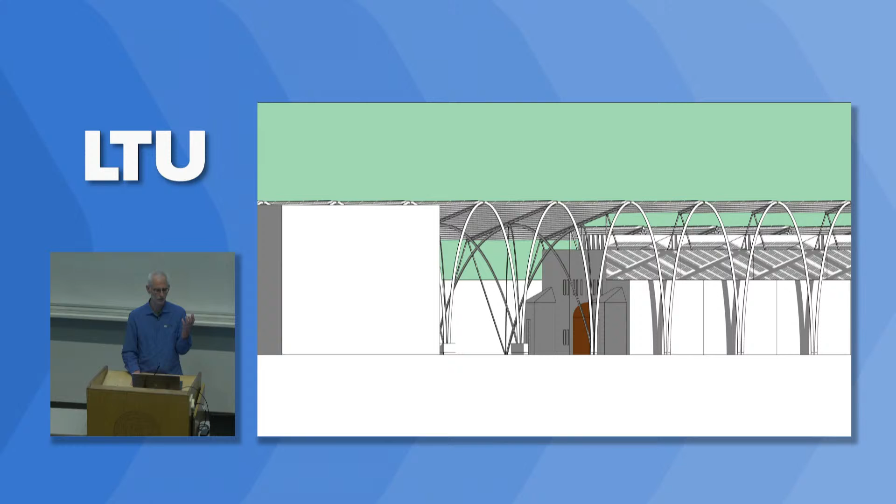The arches essentially are like a simple steel or aluminum frame support, but the idea is that it would be a light and delicate version of what is a traditional element within Islamic architecture. Old mosques, but also contemporary mosques, typically have an exterior space that allows you to transition from the outer world into the prayer hall itself, and that's just a play of light and shadow.

So this is what the parking lot would be like, and as you approach the main entry. The PV modules cast their shade and shadow onto the parking lot, invoking the sense of prayer rugs oriented to the Qibla within the space. It's like a spiritual prelude to going inside the building.

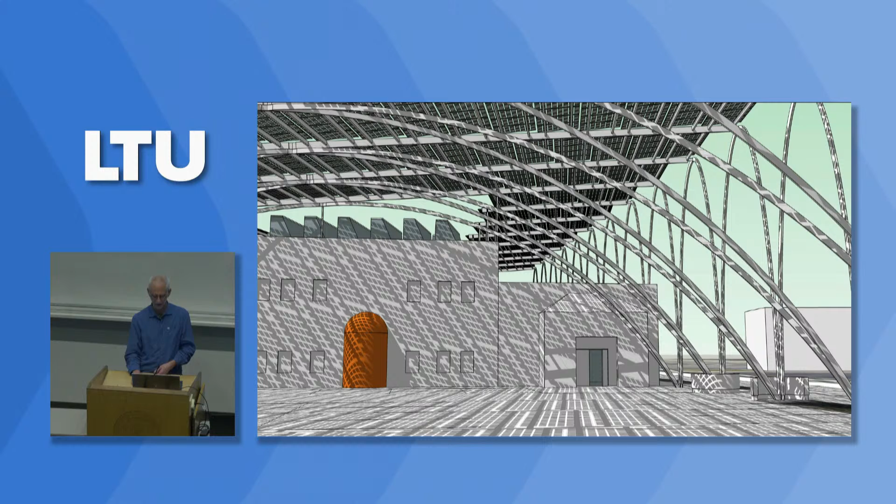Actually, the building's not so interesting, so I think this might be more interesting. You also get a new rooftop deck space, and if you go up on top of the deck, you can see that a number of new daylight monitors have been introduced, and the top of the monitor is oriented due south, skylights on top, but then they splay over to meet the building structure in the urban grid—that's what it looks like from above.

And from below, within the space, you see how the structure and transformation occurs geometrically, and then the solar cells actually perform a role similar to the traditional light screens or scrims in both traditional and contemporary mosque design. So this would be what the space would feel like in the future.

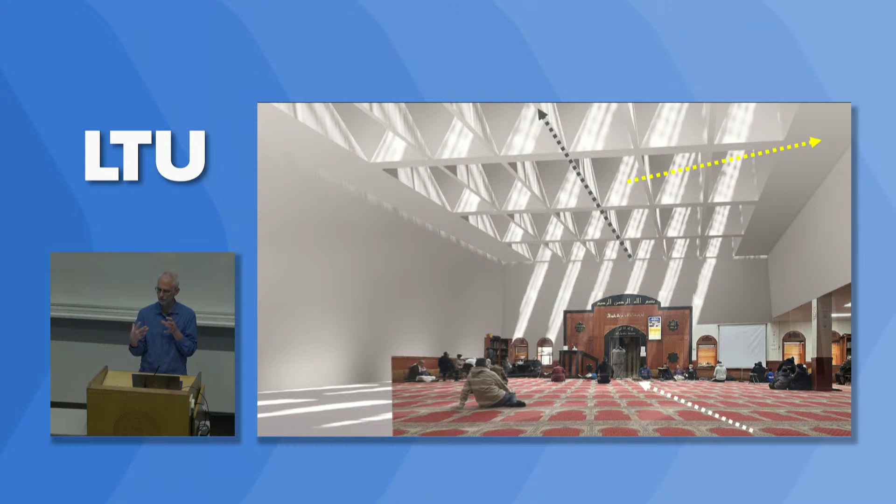This is the existing mosque space, with acoustic tile ceiling and fluorescent lighting that doesn't really evoke spirituality to me. But I think transforming it with daylight, and also being able to physically see the prayer rug orientation to Qibla—since the prayer rugs are set directly to face Mecca—and then the building orientation in gray, and the solar orientation in yellow, all those things are physically perceived at the same time.

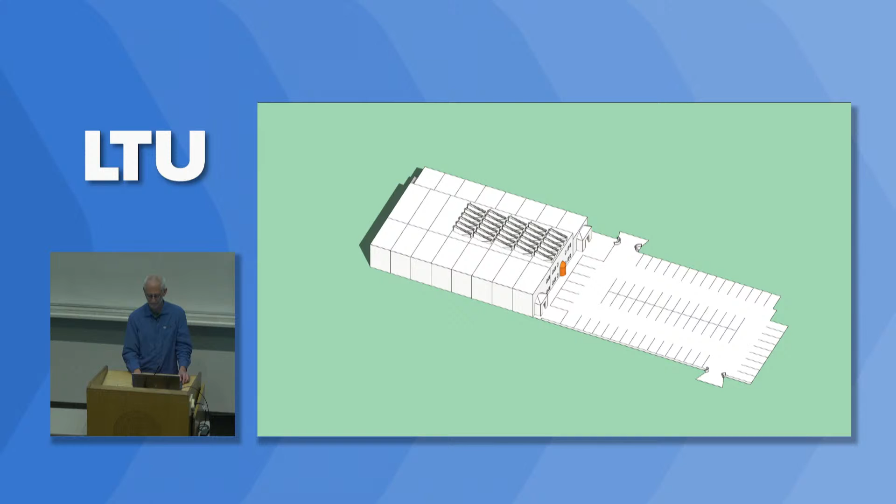Basically, the process would be opening up for the daylight, adding vertical structure, horizontal structure, the PV array, and then the final modules. I didn't realize there's a whole movement internationally to have mosques go to PV arrays for all their electricity needs. Especially in Jordan, the government basically supports PV modules being installed on mosques just to reduce energy costs and make them independent.

So the final project is the Skillman Library. I don't know if anyone's familiar with this—it's been closed for a couple of years. The Detroit Public Library System has some issues: lack of financing, lack of generating revenue, and a bunch of deferred maintenance on a lot of buildings. I don't know when the Skillman will reopen, but it's been closed since they've been developing the Hudson site.

Libraries have fairly high energy use, in part because you have temperature and humidity control. So in this case, it's a big building that has more square footage than the actual site. The site is 33,000 square feet, but you need 90,000 square feet of PV array. So what are you going to do about that?

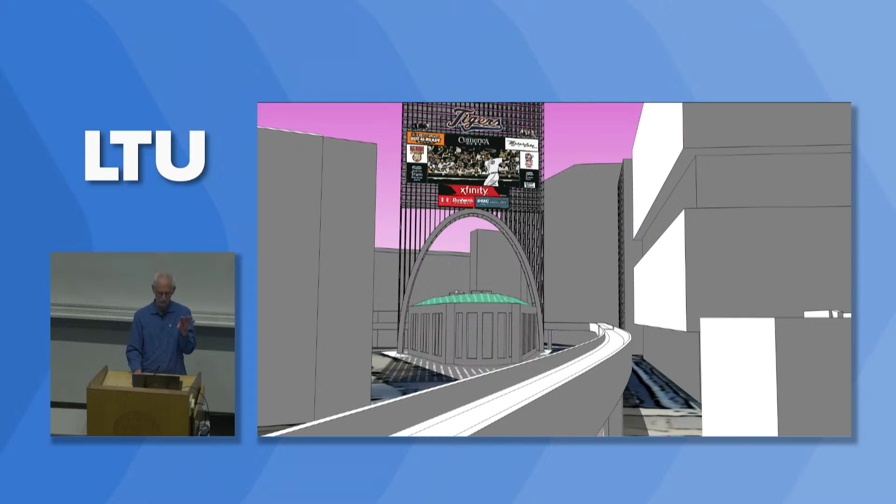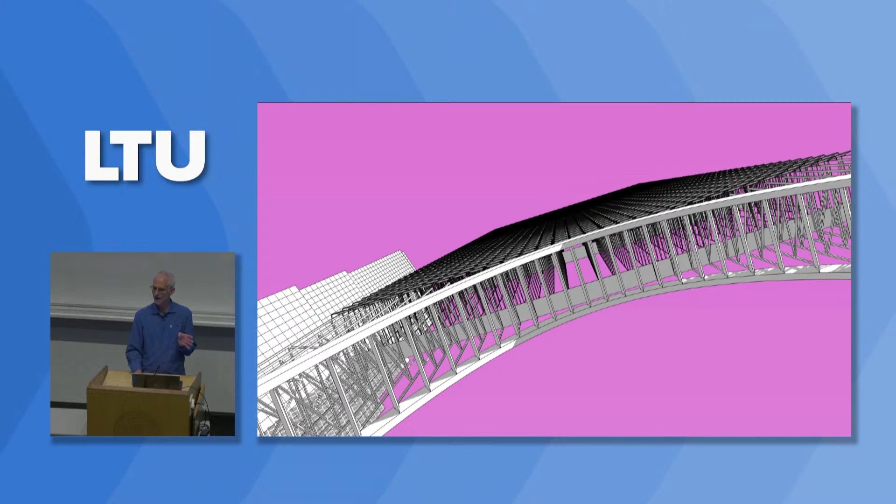If you approach the library on the People Mover, which I don't know who takes anymore, the idea is this would be part of the new architectural experience where a digital billboard generating income for the library system would be mounted. As you get off the People Mover, you see this work of urban infrastructure, and as you move around the base and head towards the entry of the library, you'd look up, and this is what you'd see.

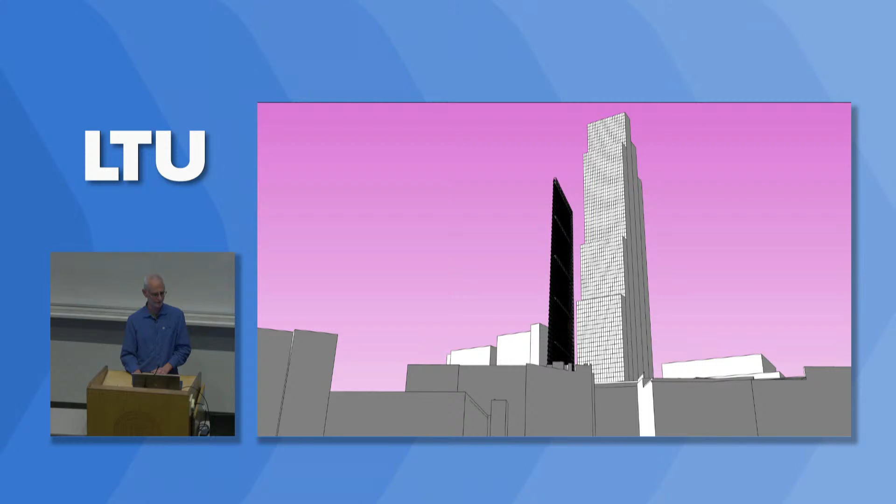And if you're coming from the baseball or football stadium, you'd see this slim tower rising up, trying to compete with the new Hudson Tower. This was inspired by the current rage of doing slim towers for tall buildings, but also the kind of wonderful urban infrastructure that's part of a lot of cities.

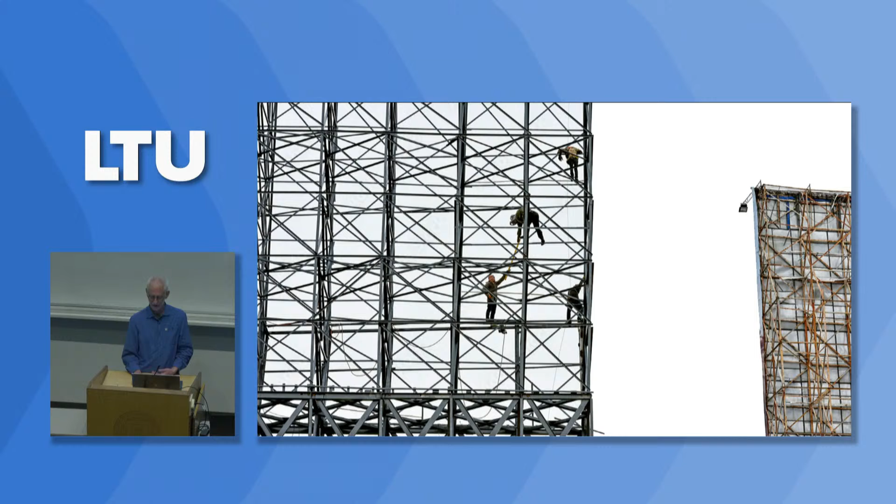The fact that you can use billboard structures - we have no problem using pretty intense structures for billboards - and the sense that you create an urban place with light and magic. This is a view looking down on the library with the PV array to the north.

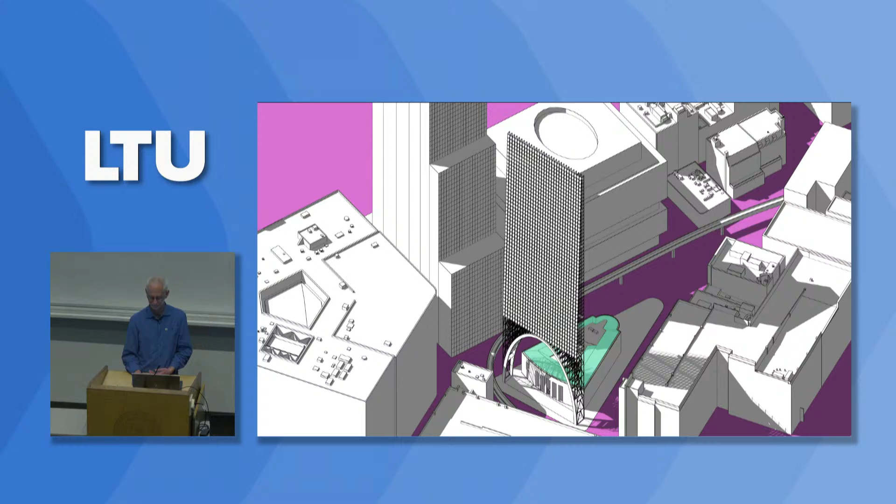This is the south view. In terms of construction, the monumental arch goes up first with the support structure, then essentially the blade or the tower, and then all of the PV modules required.

Again, the visible energy expressed is the energy used by the building. In this case, you've got a limited range of how sunlight can actually strike the PV array. That was part of the calculations, and that's why you actually need so many more PV modules for this. But there's no reason why you can't insert something like this in an urban area.

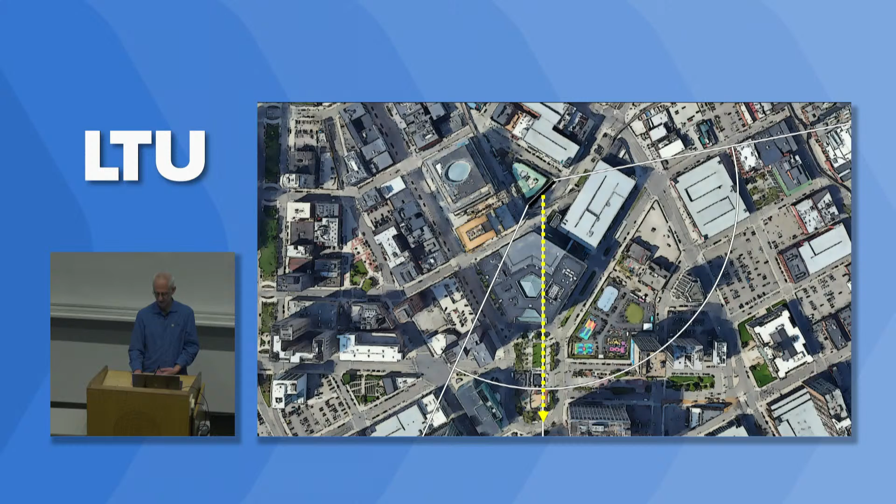This would be the falcon view or the red-tailed hawk view of the project. It's really tall, but it's way shorter than the super tall building next door. And at night, the library could project messages out to the city of Detroit.

So I'm really curious to have some feedback, whether you found this interesting or meaningful at all, or if you have any other ideas for how I could further develop this. So thank you.

Thank you, Ralph. I'm right on time, sort of. All 300 slides. Yes. Do we have questions or comments? I have a question.

Thanks, Ralph, that was great. Good to see you again. I have two questions, or one thought.

There are some smaller energy producing systems, such as in Detroit we had trash to energy. And then I worked on a project when I was a sales engineer that was methane - excrement from cows - to harness energy. Are those just too small for your study? Well, I mean, the energy question, I'm like half a percent of the big energy picture. But the bottom line is, don't burn stuff.